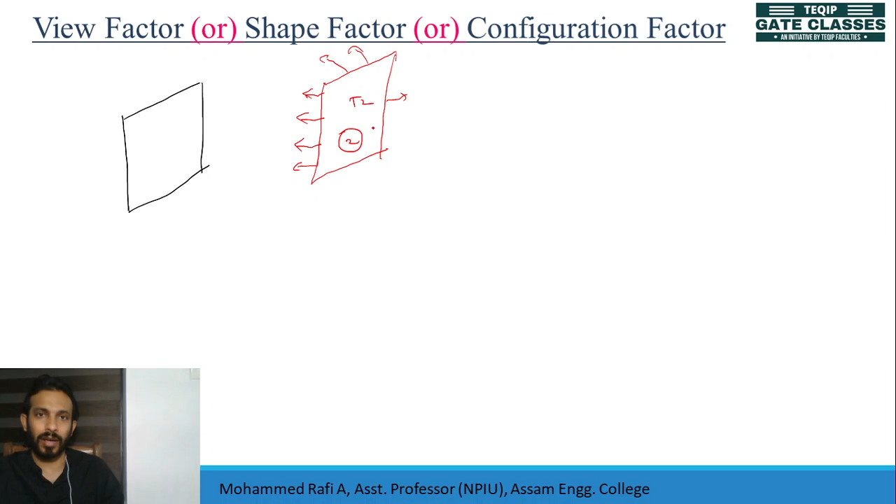So here we already discussed, for any surface having some non-zero temperature, what will happen? It will start radiating electromagnetic waves. It will be thermal radiation, and it will be either infrared, visible or ultraviolet. So anyway, this is radiating some units. Suppose I count these photons as 100 units leaving surface 2. What I am saying, 100 units of radiation are leaving surface 2. Just for understanding, I am telling you.

Then what will happen? Out of this 100, some of the radiation is hitting surface 1. If this is surface 1, suppose 50 units are reaching surface 1. What about the other radiation? Out of 100, only 50 is hitting surface number 1. That means this is surface number 1 having some temperature T1. So just like T2, this one also will be radiating in different directions, right? This is quite natural. Every surface will be radiating. So out of this radiation, some radiation will hit surface 2 also, right?

Suppose 100 units of radiation are leaving surface 1, and out of this, around 60 units are reaching surface 2.

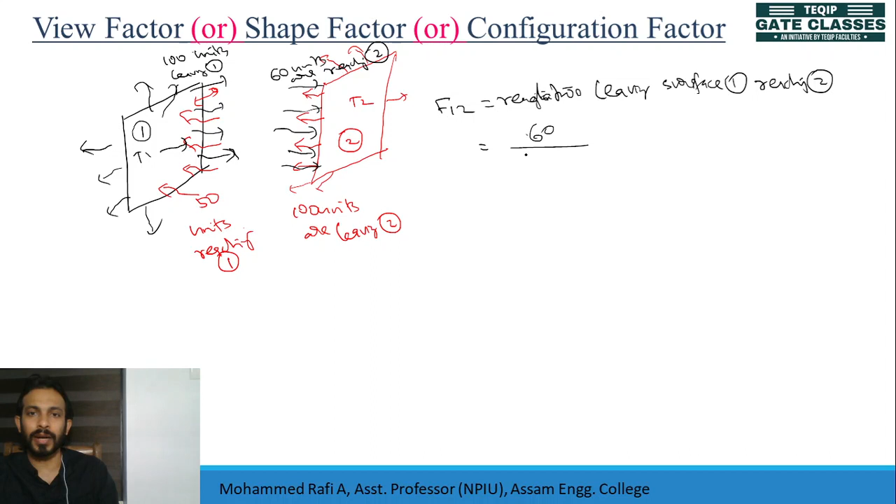F12 meaning is that radiation leaving surface 1 reaching 2. So what will be the F12? Out of 100 units are leaving, how much is reaching 2? It is 60 divided by 100. So you can say 0.6 will be equal to F12.

So for example, what will be F21? Radiation leaving 2 and reaching 1. So what is the total number of radiation leaving surface 2? It is 100. But how much is leaving surface 2 reaching surface 1? It is 50. So you can say it will be 0.5.

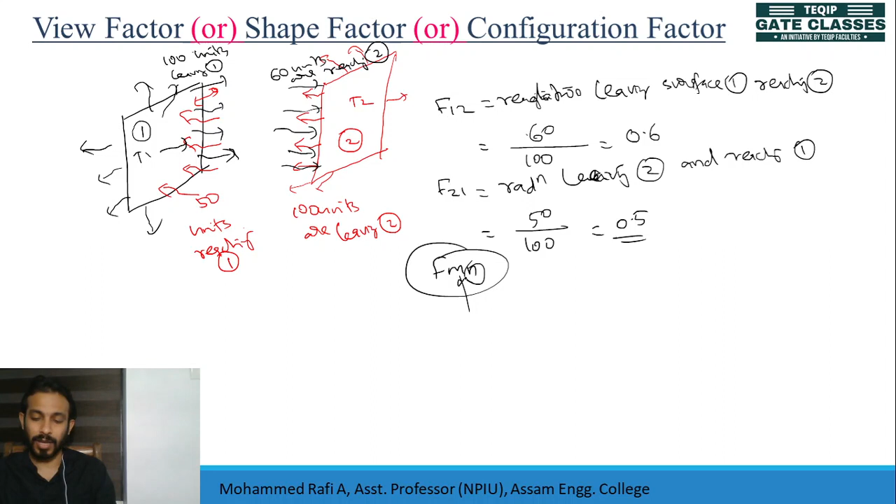Okay. So in general, I will term it as FMN. This is radiation leaving surface M and reaching surface N. So what is its relevance? It is a fraction of radiation energy leaving surface M that reaches surface N. So definitely for any surface, the value will be between 0 and 1. 0 less than or equal to 1.

Right? Suppose there are many surfaces. Just an example, you consider just like this, and radiations are leaving. Suppose this is one surface, 2, 3, 4, and 5. So if I am considering all the surfaces, like suppose radiation leaving number 1 and hitting number 3, then that will be F13. So that value will be less than or equal to 1. It can be between 0 and 1.

Okay, so that fraction will depend on a lot of parameters, mainly its geometric nature. So that is very important. You have to remember it is independent of the surface roughness or temperature, etc. It is just a geometric configuration of the object. You will get to know better once we are discussing the problems or some examples.

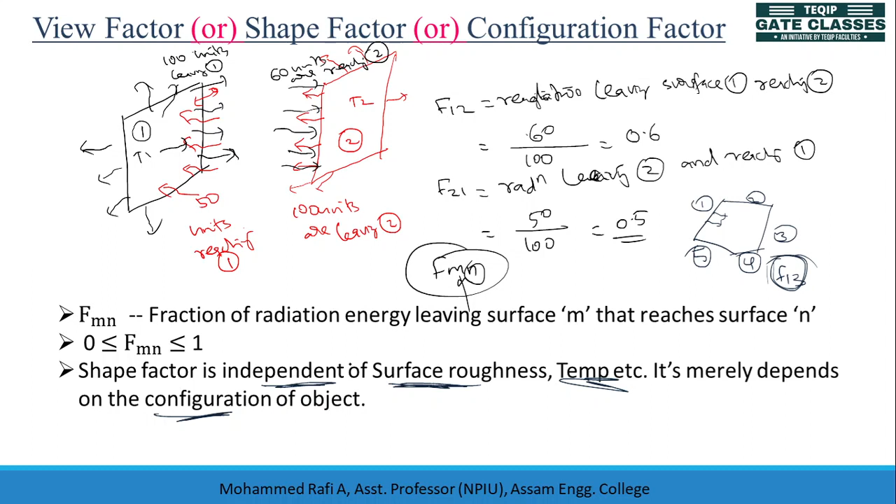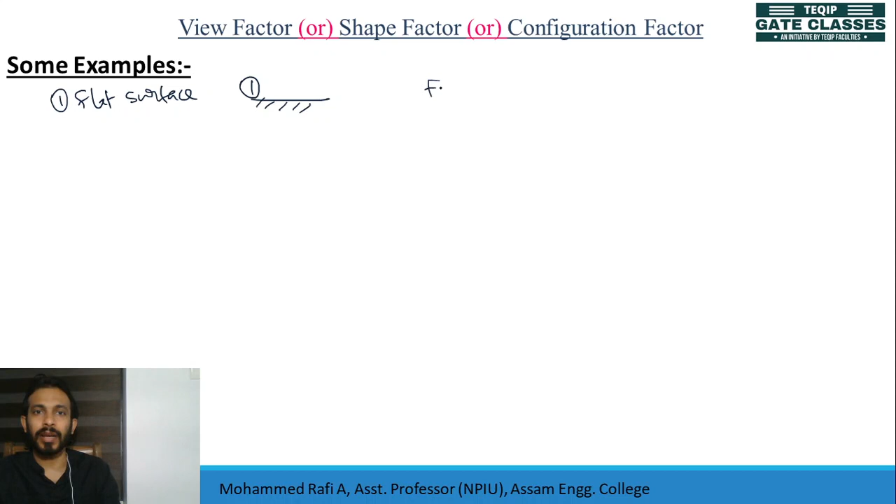So let's move on to discuss some examples. Let's consider a couple of examples. First, suppose a flat surface. So what is a flat surface? Suppose there is a surface like this, and I term it as surface number 1. Now for this point, what will be the radiation leaving surface 1 and hitting surface 1? It can be possible, right? Just look at here.

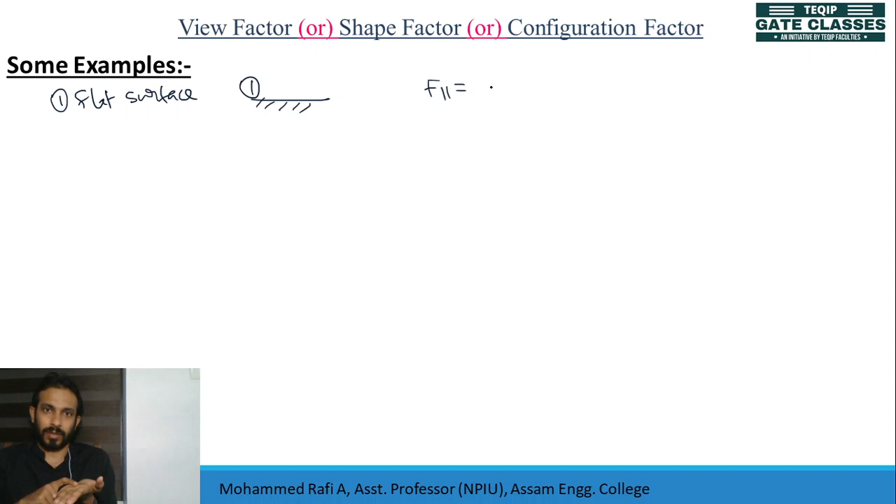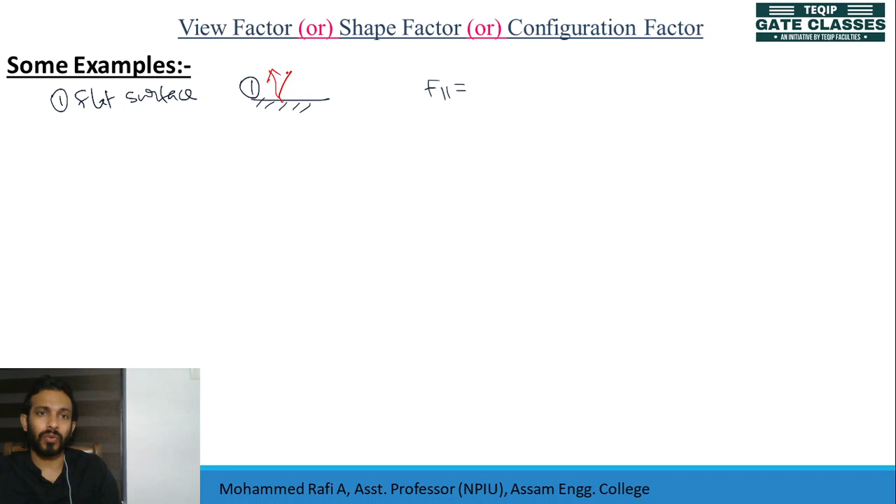For any flat surface, radiations are leaving from the surface 1 and falling back on the surface 1. So what will be the value? We have already discussed diffusive surface, non-diffusive surface, all those things, right? So basically, I'm just trying to help you get a better pictorial view about this view factor. So for any surface, radiations will be like this, right?

So for any flat surface, F11 will be equal to 0. This is very important. What is the meaning? For any flat surface, there will be no radiation leaving it and hitting on itself.

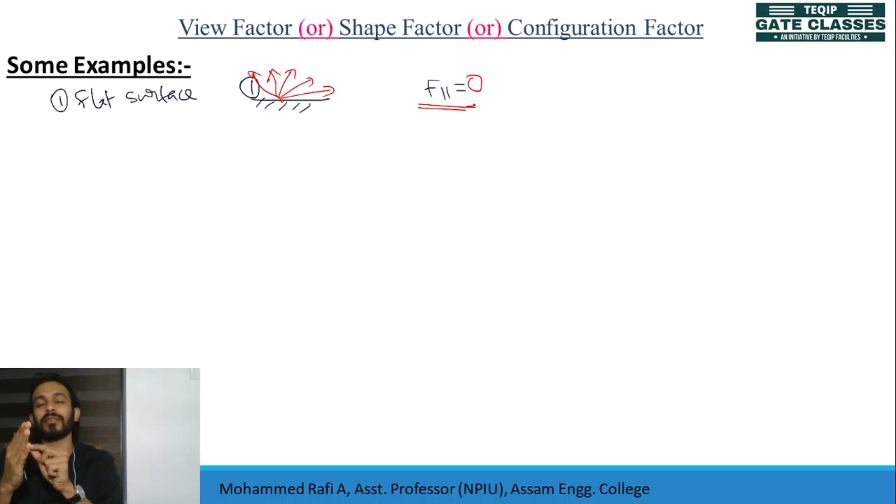It will not come back to the same surface. It may hit on the other surface and reflect back. That is a different thing. I am just talking whatever radiation leaving a single surface which is falling on the same surface will be equal to 0. In order to get a better idea, let's discuss some more examples.

A second example, suppose a concave surface. Suppose you consider a surface like this, it is concave, right?

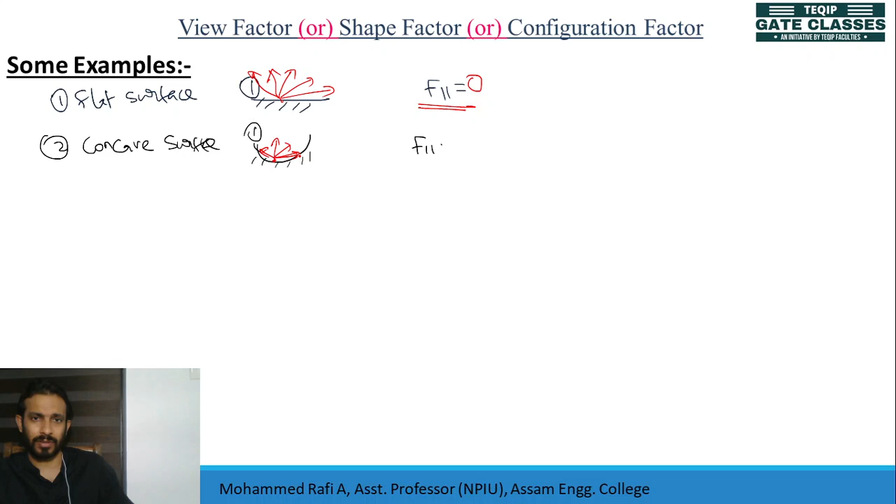So I am calling this surface number 1. So what should be the F11? What should be the radiation leaving surface 1 and hitting on the same surface? If I am just considering any point on the surface, radiation will be in different hemispherical directions, right? So you can see some portion of the radiation will be hitting on the same surface and some portion will be leaving away from the surface.

So what should be our conclusion on this? Yeah, so F11 for any concave surface will be less than 0, sorry, less than 1. It will be always less than or equal to 1. Okay, so F11 in this case will be less than or equal to 1. I hope you got the idea.

So just tell me what should be in case of a convex surface. How is a convex surface? It is like this, right? Just curved nature. So for this surface, like in the other cases, if you just imagine any point, radiations are leaving in a hemispherical direction, right? So what should be the value of F11? Radiation leaving surface number 1 and hitting on it. How much? Yes, just like the plane surface, it should be equal to 0.

So I was just giving you logic throughout the view factor problem, throughout your configuration problem. It doesn't have much relation with the radiation heat transfer concept. It is more or less like an aptitude class. It is more or less like a logical class, right?

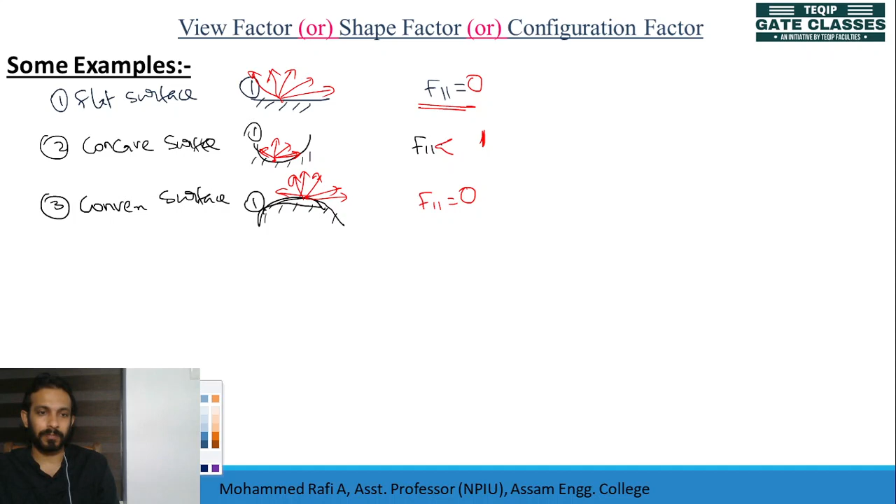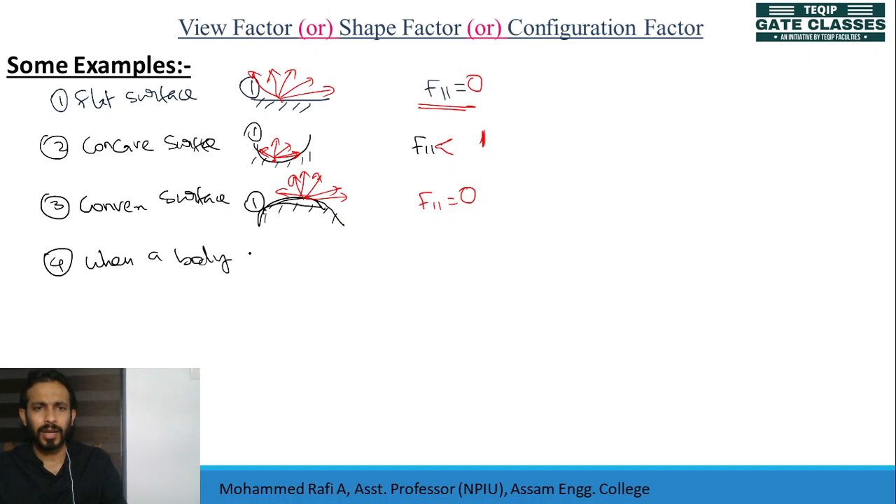So everybody, let's try some other cases, like what if a body is completely covered by another. That means, just take an example, suppose there is a body like this, and I am calling this surface 1 and another surface 2. So just imagine whatever radiation is leaving number 1, what should be the value of F11 here? Because it is a flat surface, it should be equal to 0.

What about F12? Whatever radiation is leaving 1 should be hitting 2, so it should be equal to 1. What is the meaning of F12? The radiation leaving surface number 1 hitting on surface number 2. So if 1 is completely covered by 2, all the radiation leaving 1 will be hitting on number 2. That is why F12 equals 1.

So similarly, what about surface number 2? Whatever radiation is leaving number 2 and hitting number 1, what should be the value? Suppose this way, leaving number 2 hitting number 1. So definitely it will be less than 1. It is some positive value but less than 1, because some portion of the radiation will be hitting back on the same surface because it is a concave surface.

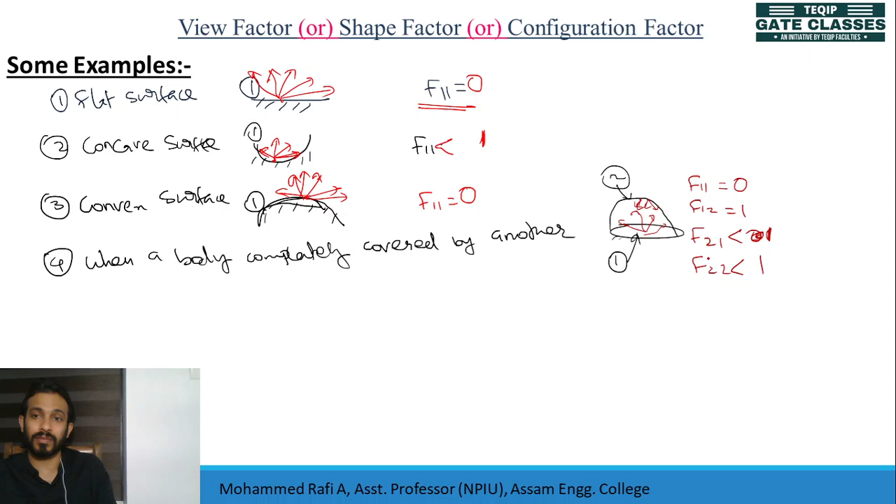Understood? So in this case you can see F22 will also be less than 1, but you can conclude that F21 plus F22 should be equal to 1, right? Because there is nothing else; whatever radiation is leaving surface number 2 will be hitting either the same surface or surface number 1, because it is a complete enclosure. Understood?

Now let's take another example, two concentric spherical surfaces. I hope you guys are getting some image, following this lecture. So let's try to figure out what will be the case. Suppose there are two surfaces. Suppose this is a sphere and I am calling it surface number 1, and this outer surface as surface number 2, and both are spheres. So what will F12 be equal to? What is the meaning of F12?

Guys, please listen to me carefully, because if you get clarified about the concept regarding this slide and also the upcoming slide, then all the problems will be much easier for you. All the questions related to the shape factor or view factor you can easily solve by yourself. There is not much complication or twist in this type of question. Only thing is you should have some basic understanding of the meaning of view factor, the meaning of that terminology.

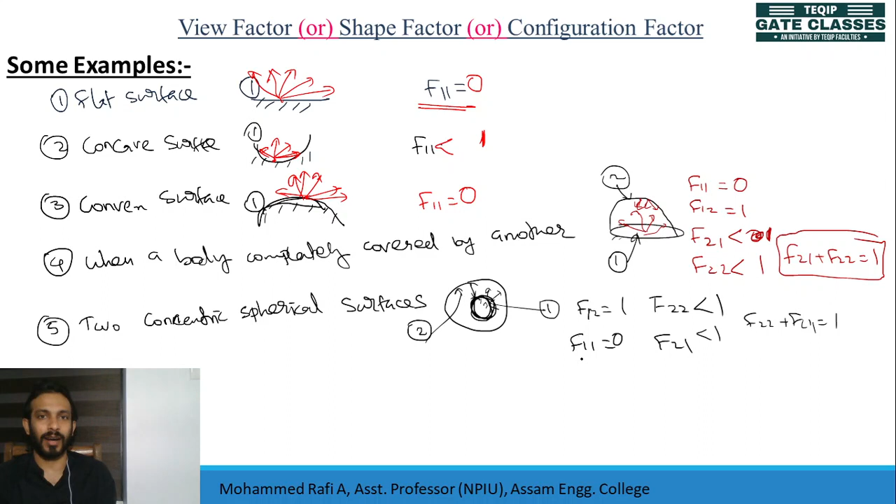So definitely you can see it should be equal to less than 1. So similarly F21, radiation leaving 2 and hitting on number 1. What goes from 2 and falls on 1, that also will be less than 1. So you can say F22 plus F21 equal to 1. Just like the previous case, here also you can make a conclusion: for a completely covered surface, the inner surface, all the radiation leaving from that will be hitting on the outer surface. So this is all about some examples related to the view factor.

Now I am going to discuss some rules for the calculation, because this is also very important, because while we are doing some problems, there will be a lot of scenarios where these kinds of rules will be helpful. So let's see how this will be helpful. So what is the summation rule? Basically, indirectly I have already discussed the summation rule. For any surface, suppose there is one surface and there are multiple surfaces, suppose m number of surfaces.

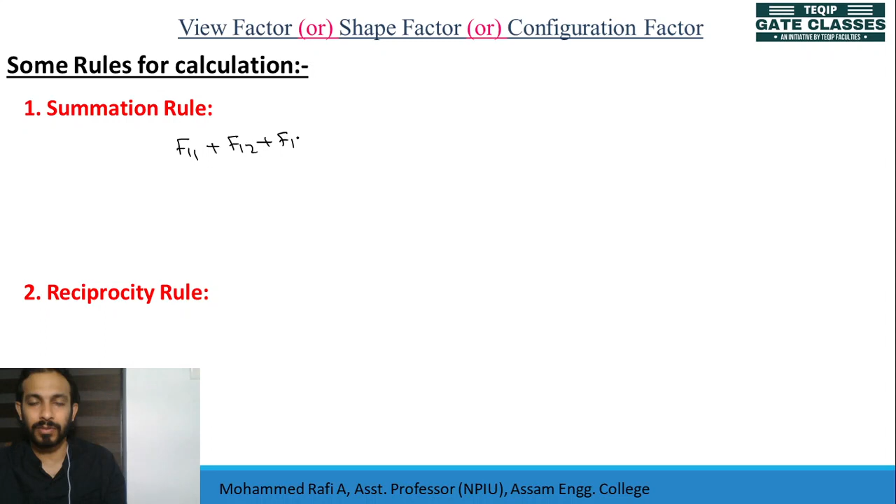So if I am taking the sum of all the shape factors: radiation leaving surface 1 and hitting on surface 1, plus radiation leaving surface 1 hitting on surface 2, radiation leaving surface 1 and hitting on surface 3, up to radiation leaving surface 1 and hitting on the mth surface, then what should be the summation? If I am taking the summation of all the view factors for a particular surface, definitely it should be equal to 1.

What is the meaning of view factor? The portion of radiation hitting on the other surface to the total radiation leaving. Okay, so this is the basic idea. So for any surface it will be the same. Suppose in case of the second surface, radiation leaving surface 2 and hitting on 1, radiation leaving surface 2 and hitting on 2, F23, just like that, F2m equal to 1.

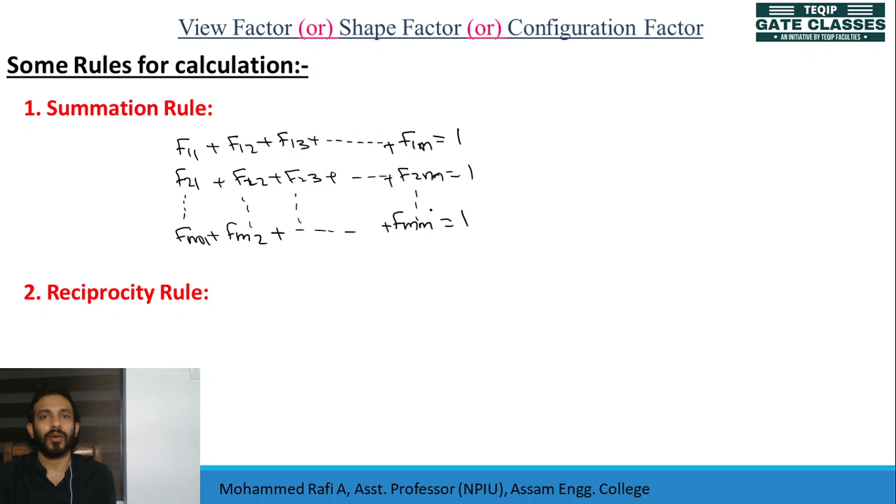So similarly, for m surfaces, it will be radiation leaving surface m and hitting on surface 1, radiation leaving surface m and hitting on surface 2, and similarly radiation leaving surface m and hitting on the same surface m, equal to 1. So this is basically the basic idea about the view factor. If you take the summation, it should be equal to 1. Similarly, there is another rule that is called the reciprocity rule. So what is the meaning of reciprocity rule?

Suppose you take two surfaces, just like in the previous case, one surface and another surface, and these two surfaces are interacting radiation. Suppose this has a surface area of A1 and this has a surface area of A2, and radiation leaving surface 1 and hitting 2, and radiation leaving surface 2 and hitting 1, are F12 and F21. Then the relationship is that A1 into F12 should be equal to A2 into F21. This is the meaning of the reciprocity rule.

It is very easy to understand what this rule is saying. Suppose you take two surfaces having the same temperature. These two surfaces will be interacting radiation. So in order to make the heat transfer equal, A1 F12 should be equal to A2 F21. In the next class we will be talking about the radiation network analysis, things like radiosity and irradiation. We will be mainly focusing on how this radiation heat transfer takes place.

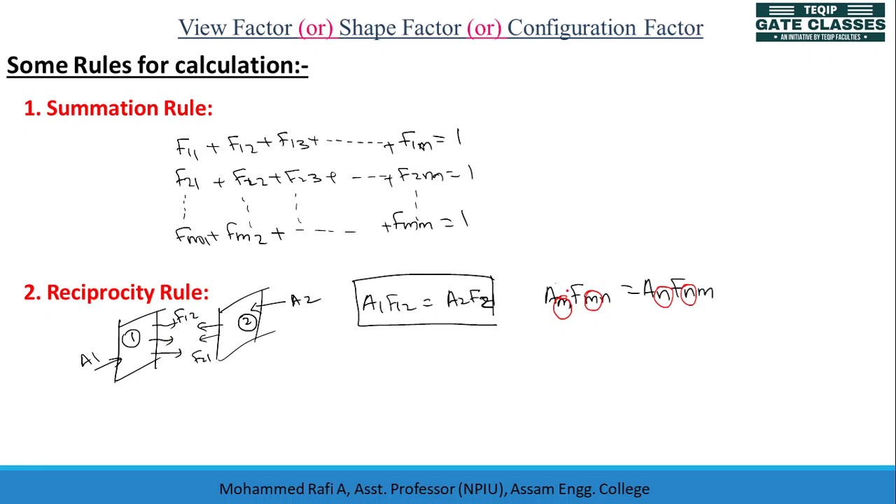Make sure you are having the same parameter, m-n or n-m, that is, whatever radiation is leaving this, if you multiply it with the view factor and area, then it should be equal. Okay, so let's move on to solve some questions. This is a very interesting question.

Most of the questions are very interesting, but guys, please believe me, once you start solving, you will see a lot of different types of questions are asked, but the basic concepts are the same everywhere. So the main pitfall in this kind of question is, just remember, be careful about the mathematics or the simple algebra.

Don't make mistakes. Another thing is, sometimes they will talk about the sphere, sometimes it will be a cylinder. In that case, the surface area of a sphere and of a cylinder are different. So those kinds of small twisters are there, but in general these questions are very easy, very straightforward, and I have seen many questions repeatedly asked in GATE as well as in IES.

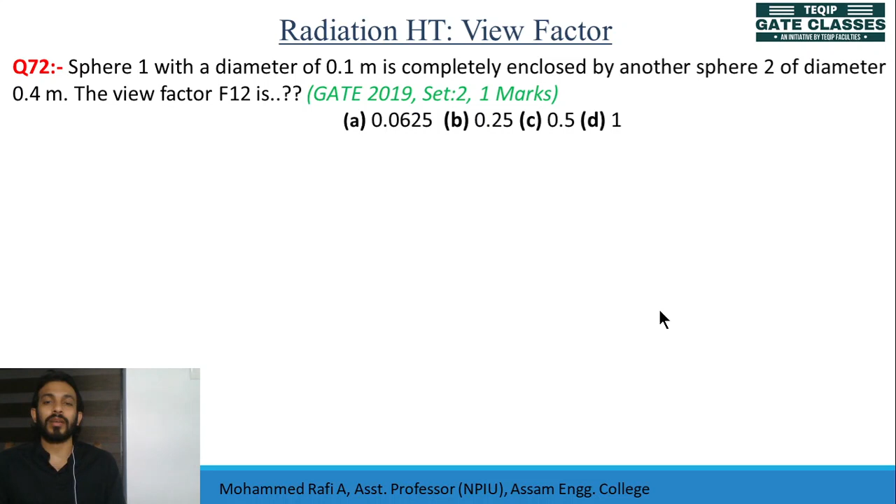So here this is a question from 2019, a very recent question, asked for 1 mark. So let's try to solve it. Read the question thoroughly and let's see how we can solve it. A sphere 1 with a diameter 0.1 is completely enclosed by another sphere 2 of diameter 0.4, and the view factor F12 is asked. Just try to imagine the scenario. There is one sphere, and another sphere 2, right?

So what is the radius here? This one has a diameter equal to 0.1. This one has a diameter equal to 0.4 meter. Now the question is F12. Don't get confused. They could have asked F21 or many other things, but here the question is directly F12. So what is the answer? F12 means radiation leaving surface 1 and hitting surface 2, right? So what should be the answer?

What is the value of F11 here? Because it is a convex surface. So just imagine a ball, a football.

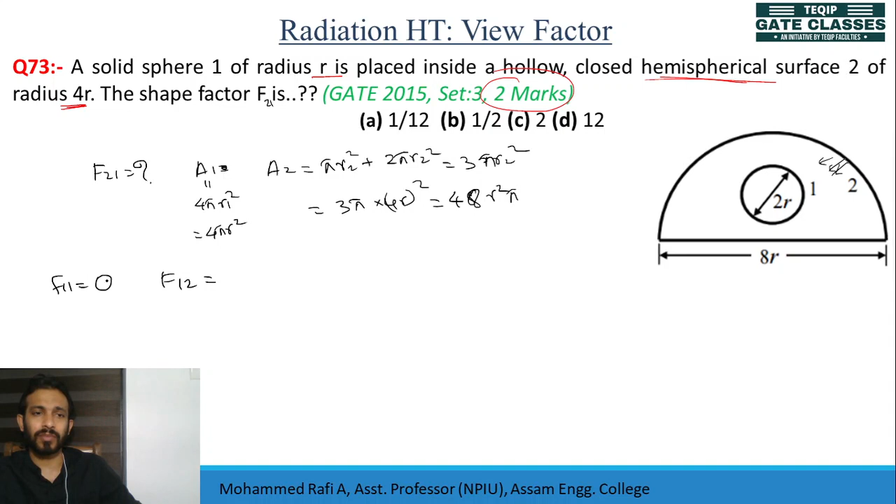What is F12? What is F11 here? The radiation leaving surface number 1 hitting on surface number 1 will be equal to 0, because we already know it is a convex surface. So for a convex surface, whatever radiation leaving surface number 1 will not hit on the same surface. So what should be F12? It should be equal to 1 itself, right?

In the summation rule, we already know F11 plus F12 equals the total, equal to 1. So if F11 equals 0, then you can say F12 equals 1. So if you know F12, how to find out F21? You will use the reciprocity rule. That is, A1 F12 should be equal to A2 F21, right? So then F21 you can say is A1 by A2 into F12.

What is A1 by A2? We already know what is area 1, what is area 2. So you can see 4 pi r square divided by 48 pi r square into F12, and we already calculated F12 equal to 1. So here you can see it will be equal to 1 by 12, that is option number A. How many of you got the right answer? Did you get the right answer?

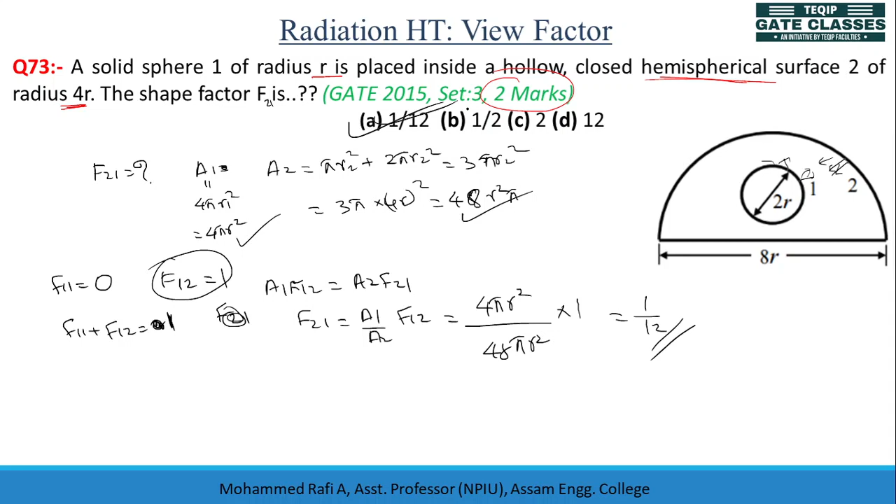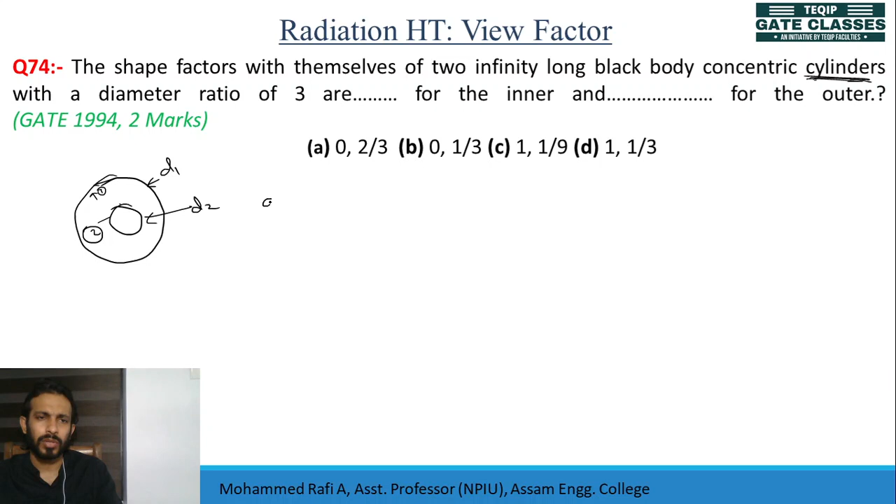Okay, so let's move on to the next question. Please go through this question. The shape factor with themselves of two infinitely long black body concentric cylinders. In the previous case I was talking about a sphere, but here it is a concentric cylinder having some diameter ratio. Suppose this is surface number 1, with diameter d1, and this is surface number 2, having a diameter d2. So d1 by d2 should be equal to 3, that is given already.

Now the question is, what is F11, what is F22? In the case of a concentric cylinder with a diameter ratio of 3, for the inner surface, that is F22: this is a convex surface, so F22 equals 0. What about F11? That we don't know, right? Now we have to find out F11. F11 equals 1 minus F12, because F11 plus F12 will be equal to 1 using the summation rule.

Now I have to find out what is F12. Since F22 is equal to 0, F21 will be equal to 1. That is also from the summation rule. So if I know F21, then F12 will be equal to A2 into F21 divided by A1. So what are A2 and A1? What is the surface area of the inner cylinder? Instead of the sphere, now we have to consider the cylinder. That we already studied in the conduction portion.

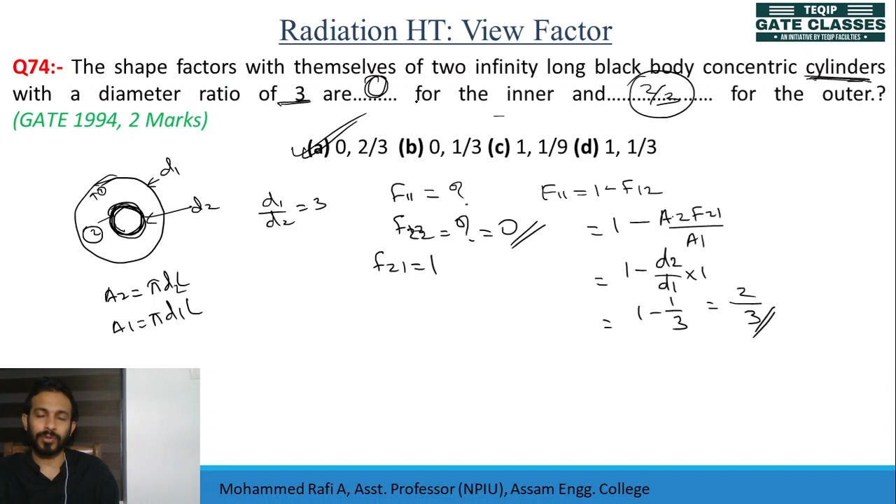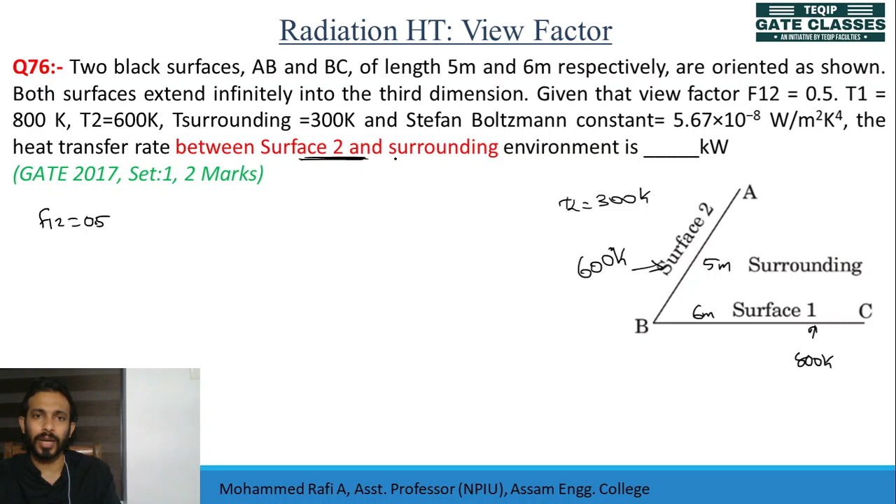Both surfaces extend infinitely into the third dimension, from the plane of the diagram. Given the view factor F12 is 0.5 and temperature T1, this surface having a temperature 800 Kelvin, this surface having a temperature 600 Kelvin, and the surrounding T infinity 300 Kelvin. Stefan Boltzmann constant we already know, 5.67 into 10 to the power minus 8. The heat transfer rate between surface 2 and surrounding, so if I am calling it surface 3, the question is Q23. What is the heat transfer between surface 2 and 3?

So this is why I told you what is the relevance of a view factor. I will be discussing the direct equation in the next class, but the equation will be F23 into A2 into sigma into T2 to the power 4 minus T3 to the power 4. This is the general equation. Rest of the things like A2 you can calculate. Only confusion is F23. So how to find out F23? That is our main concern in this question.

So guys, please try how we can find out F23. So F23, you can see using summation rule. Summation rule, F23 I'm talking, right?

Using summation rule, you can say for the surface F21 plus F22 plus F23 equal to 1. That we already know. So what about the F22? F22 will be equal to 0. Why? Because it's a plane surface. For any plane surface, the radiation will not hit back on the same surface. So it should be equal to 0.

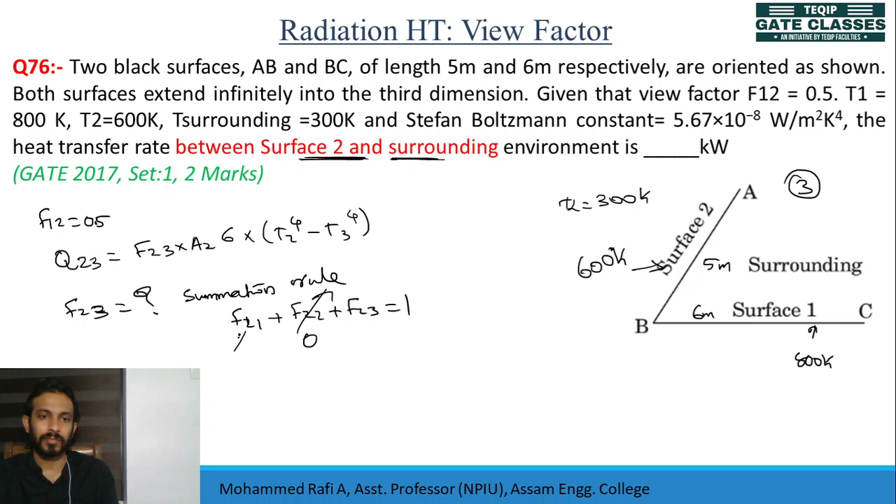What about F21? F21 we don't know, but we know F12. So ultimately you can say F23 equal to 1 minus F21. So that one you can say 1 minus A1 F12 divided by A2 using the reciprocity concept. Right? I hope you guys are calculating by yourself. Now let's do 1 minus, what is A1? Surface area of 1. So that should be equal to 6 divided by 5 into length. So it will be getting cancelled on both sides, into F12. F12 is already given as 0.5. So it should be equal to 1 minus 0.6 equal to 0.4. That is the value of F23.

Now Q23, from the diagram you can see, 0.4 into what is the length, surface 2 का जो surface area होगा, 5, into 5.67 into 10 to the power minus 8 into T2 minus T3. T2 is 600, right? 600 to the power 4 minus T3 is 300 to the power 4. So if you do this calculation, you will end up with an answer 13.78 kilowatt. That means this answer will be 13.78. Okay. So this is also a straightforward question. Only the pitfall was calculating the shape factor. That is why I was discussing this question in today's lecture.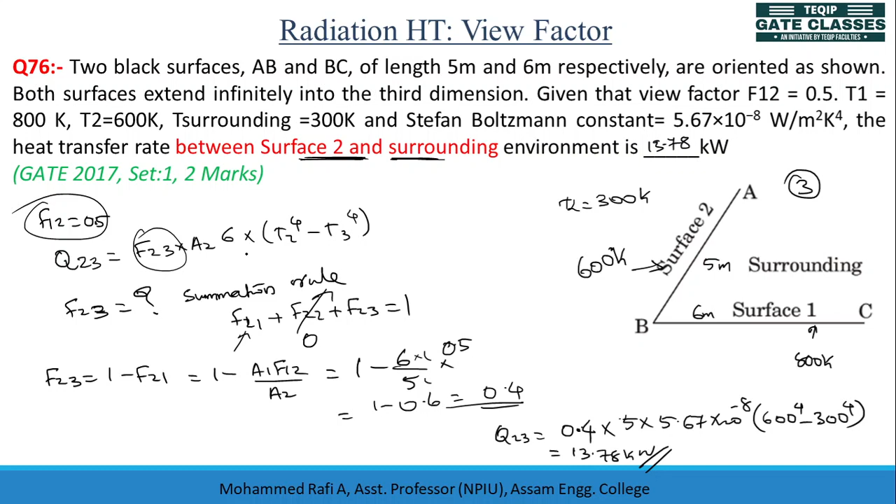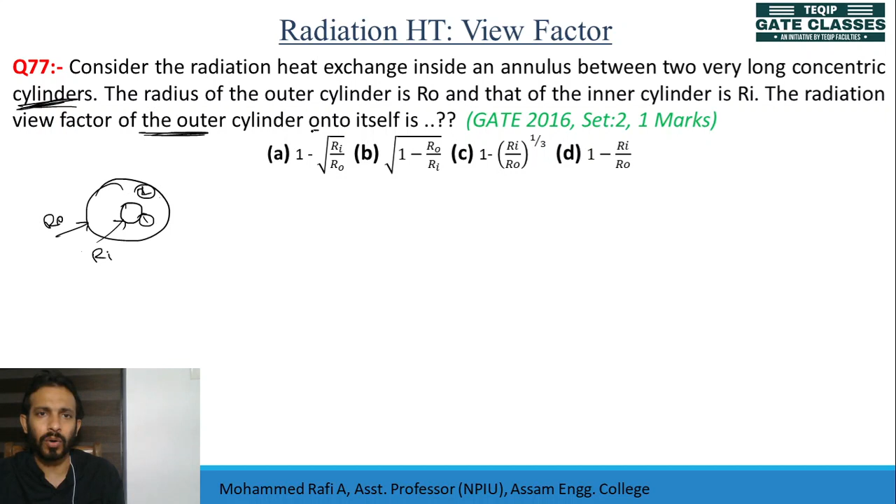So let's move on to the next question. Let's see how we can solve this. Everybody please go through this. So this is also a very straightforward question. We have already discussed a couple of questions similar to this. Consider the radiation heat exchange inside an annulus between two very long cylinders. Okay, so there are two cylinders like this. The radius of the outer cylinder. Suppose I am calling it as 2 and 1, and this is having a radius Ri, and this is having a radius Ro. Then we have been asked to find out the radiation view factor of the outer cylinder onto itself, that is F22.

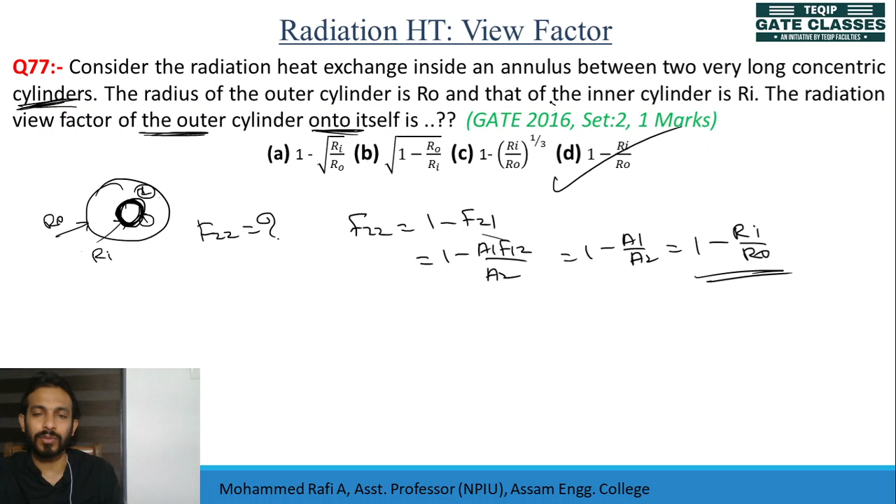So just like we have done in the previous cases, you can say F22 equal to 1 minus F21 using the summation rule. So 1 minus A1 F12 divided by A2. कैसे मिला है अभी बताऊंगा नहीं, कितना बार समझाएगा नहीं. So how you will calculate F21? F21 is using the reciprocity rule for the F12. What is the F12? Just because it is a convex surface and it is completely covered by surface number 2, F12 will be equal to 1, right? So you can say 1 minus A1 by A2 into 1. 1 minus pi D L, right? Because it is a cylinder. So it is 1 minus Ri divided by Ro. The option number D. GATE 2016 का single mark question है.

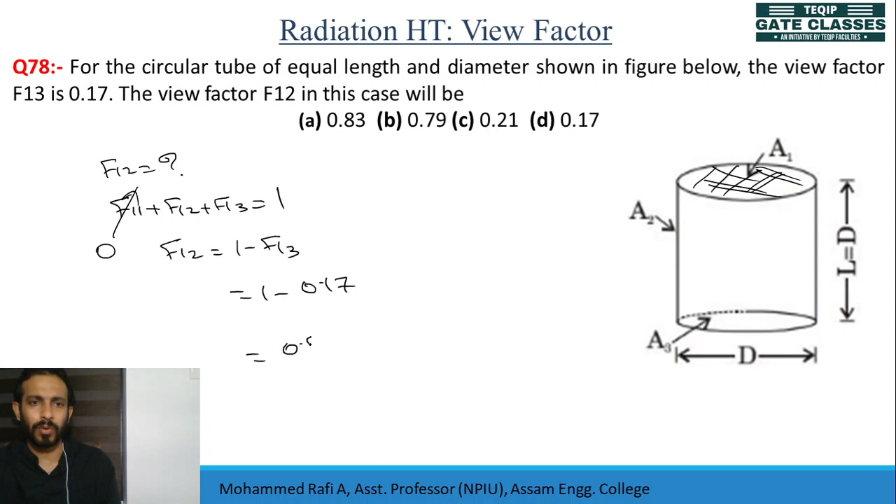ठीक है. So let's move on to the final question of today's lecture. So for a cylindrical tube of equal length, everybody please read the question and try to solve by yourself and let me know. Yeah. What is the F12? So using the summation rule, you can say F11 plus F12 plus F13 will be equal to 1. So what about F11? This is surface number 1. F11, it is a plane surface, so its value will be equal to 0. So F12 will be equal to 1 minus F13, so equal to 1 minus 0.17, it is 0.83. That is also a straightforward question from this topic.

So guys, till now whatever I was discussing is the view factor, why it is important, how we can calculate the view factor. So you have to remember only one thing, the configuration, the terminology F12, what is the meaning? Leaving number 1, hitting on number 2. Another thing, for a surface of a cylinder and sphere, what is the basic difference in the expression for area. Okay, so if you know this much, then things will be very much easy. So in next class, I will be talking about the radiation network analysis. That will be how we will be calculating radiation heat transfer between two surfaces.